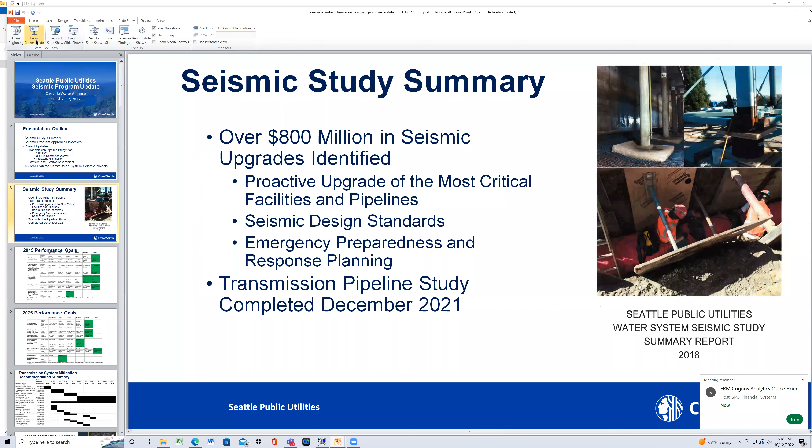Again, it's a long-term plan, a long-term program. We're not going to be able to fix everything tomorrow or upgrade everything tomorrow. The purpose of these next two charts is basically not so much to argue whether it should be 2 months or 6 weeks for 2045, but to show that things are generally going to get better, but that's going to take some time.

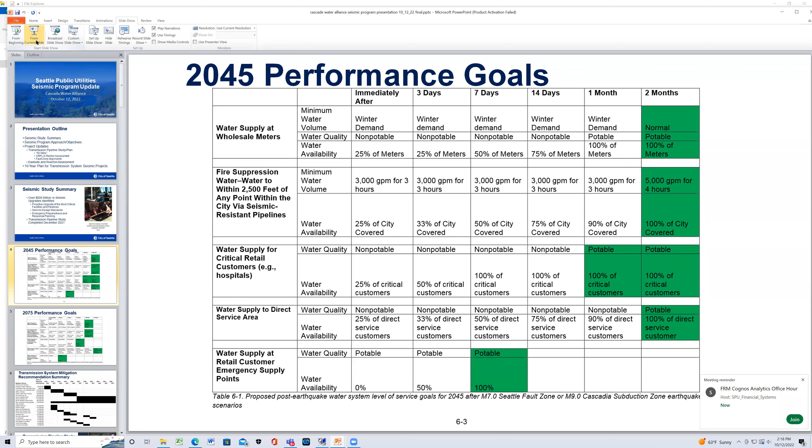So these are the 2045 performance goals, out almost 25 years. As you can see, there's still going to be, if there is a major earthquake, some significant damage and some significant recovery involved. Going out to 2075, more than 50 years from now, things get a little better.

If you're looking out maybe 100 years, my vision for 100 years would be if we had a major earthquake such as a magnitude 7 or magnitude 9 earthquake on the Cascadia subduction zone, it would look somewhat like it looked after the Nisqually earthquake. That is, it's still going to be a big deal, but it's not going to be a disaster where you have people without water for a month or two.

To try to meet these goals, we came up with a long-term plan, out of the seismic study. So far, well, it's only 4 years, so of course we're mostly on track. Where we're falling behind a little bit are on some of the projects that are more internal labor intensive. For example, the seismic isolation valve, we haven't really gotten very far in that.

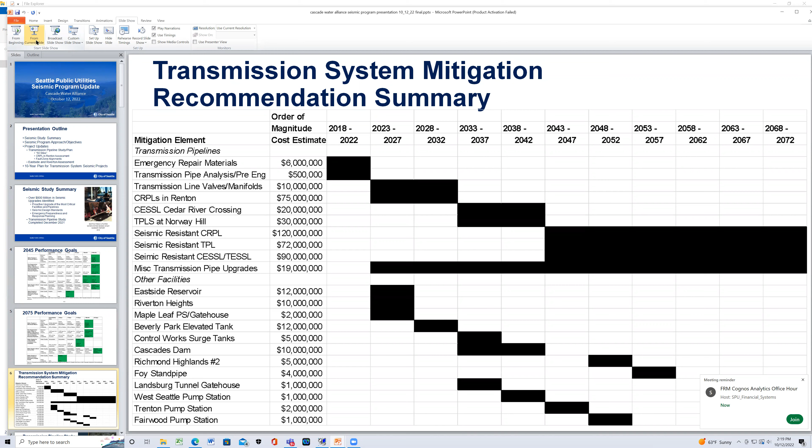We've been running into manpower issues as far as getting emergency repair materials so that we'd have those in stock if there was a major earthquake before we could upgrade things and had to make emergency repairs. So those are proceeding, just a little bit behind schedule due to staffing issues. As far as some of the CIP projects where we're hiring consultants, those are pretty much on track.

Shifting into some of the projects that have recently been completed, late last year we got the final report for the transmission pipeline study. There are actually 3 studies within a study.

The first was what we call the 50 site study, looking at approximately 50 sites we didn't have the resources to get to during the original seismic study. We hired Infraterra as a consultant, and they went out to all these sites - actually 53 or 54 - and looked at available soil borings and made assessments as to the vulnerability of these different transmission pipeline sites.

We also did preliminary engineering for the Cedar River pipeline and Renton site. Cedar River pipelines 1, 2, and 3 go through a liquefiable area - it's a low area - and we identified this in the original seismic study as being vulnerable. So Infraterra did some preliminary engineering and came up with some recommendations.

And then finally, the third study within the study was looking at what would happen to transmission pipelines if there was fault rupture, and making some estimates - what type of pipe would be needed if we wanted to resist potential fault rupture.

Shifting back to the 50 site study, this is an example site form done for over 50 sites. It basically describes a pipeline. If you look down here, it shows potential settlements and lateral spreading for 4 different scenarios. This happens to be the Eastside supply line, Coal Creek crossing. What's driving it here is the Seattle fault and the 2475 ground motions.

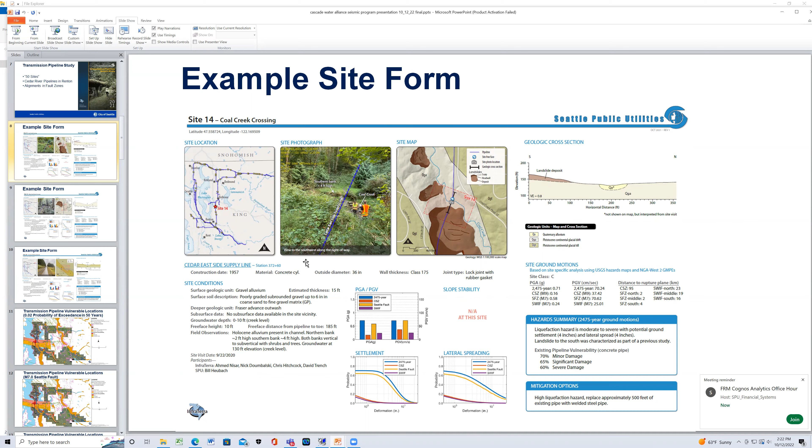Another example, a little bit further south on the Eastside supply line - this is the May Creek ravine crossing. With May Creek, it's not lateral spreading or settlement, it's more slope stability, but again there's some potential vulnerability in there.

Using a third site example, this is out on Tolt 1, also a concrete cylinder pipe. What's a little different from the Eastside supply line sites is what's driving this site is the South Whidbey Island fault, this purple line - it's not the Seattle fault. So the same event that causes problems on the Eastside supply line will not cause problems on the Tolt 1 pipeline, at least out here near the treatment plant, or somewhat close to it. That's important to note.

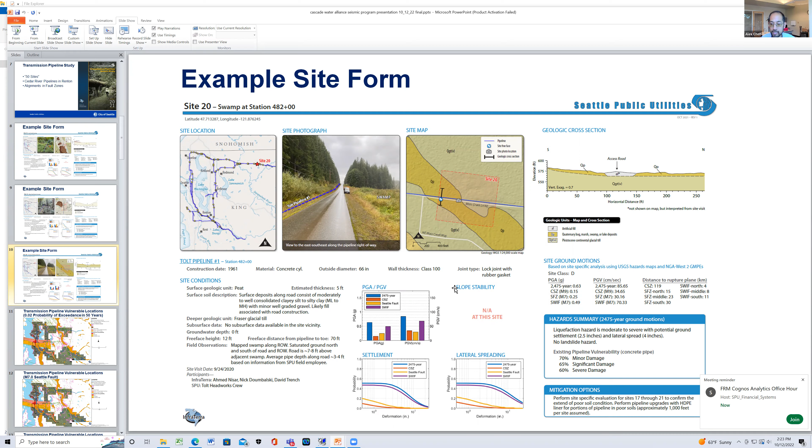Hey Bill, there's a question in the chat here. Josh from Kirkland was asking about the previous slide with the percent of meters on service level recovery - is that referencing the number of wholesale meters we aspire to have active?

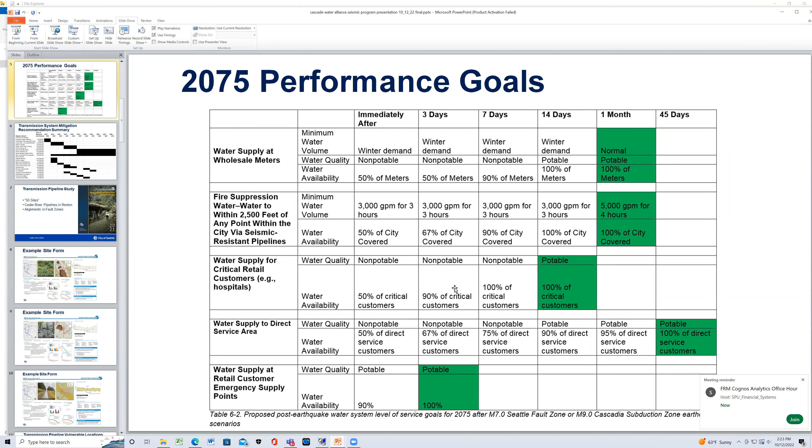Oh, we're going up here. This slide, I think, is what he's talking about - performance goals, water supply performance at wholesale meters. Yes, that's a percent of wholesale meters. Okay, thanks, thank you.

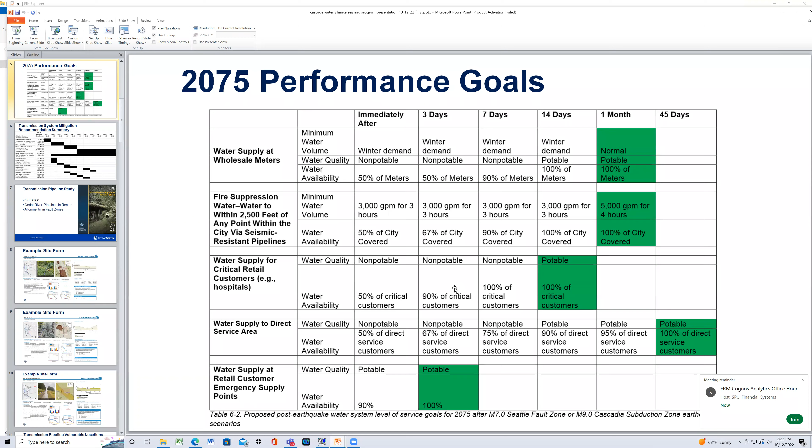Carry on, okay, I'll monitor the chat. Yeah, I can't see the chat since I'm doing it in this mode. If you want to wait 15 minutes, I could try to troubleshoot it, but we'll move on.

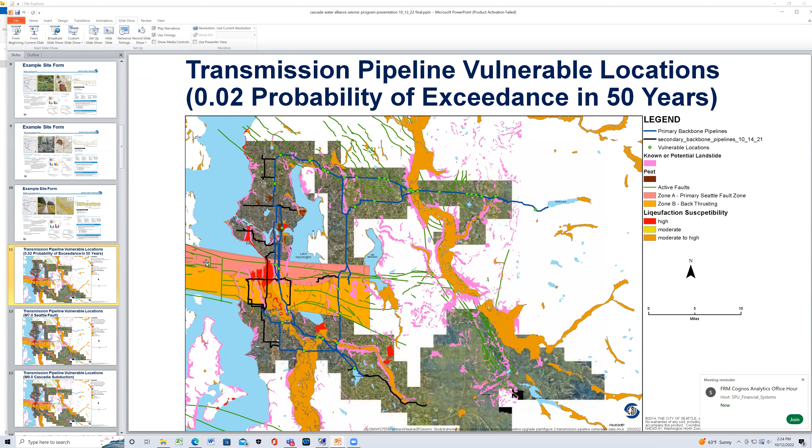What's important to note is that those probabilistic ground motions are not going to occur at all sites simultaneously. So this looks bad, but it would not be this bad for a single event.

As an example, moving down, this shows for the magnitude 7 Seattle fault event we looked at. You can see there's still a significant number of breaks affecting just about all the transmission pipelines, but it's not quite as bad as if the 2475 motions were to occur simultaneously.

What's interesting, and why I used the May Creek and Coal Creek slides, is if you look here, Coal Creek is still shown as vulnerable during the Seattle fault event, but May Creek is not. So that's saying that for May Creek to have problems, the event would have to occur closer to May Creek than the event we assumed during our analysis.

That's important to point out - there are a multitude of different scenarios here. We looked at 3 or 4 discrete scenarios, but there are many more, so there is some uncertainty in all this.

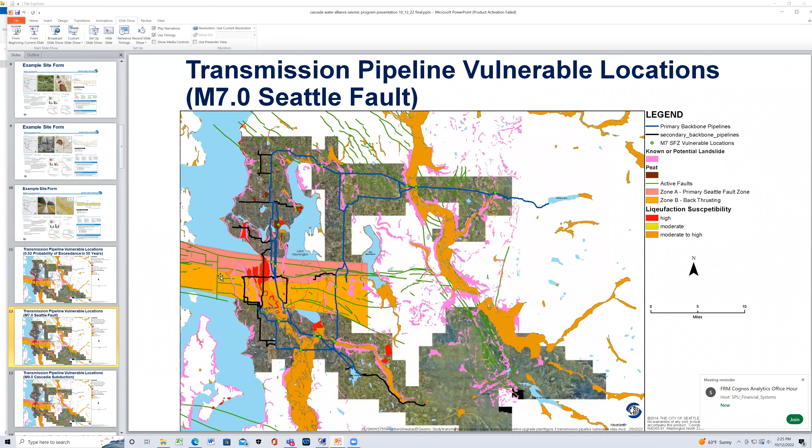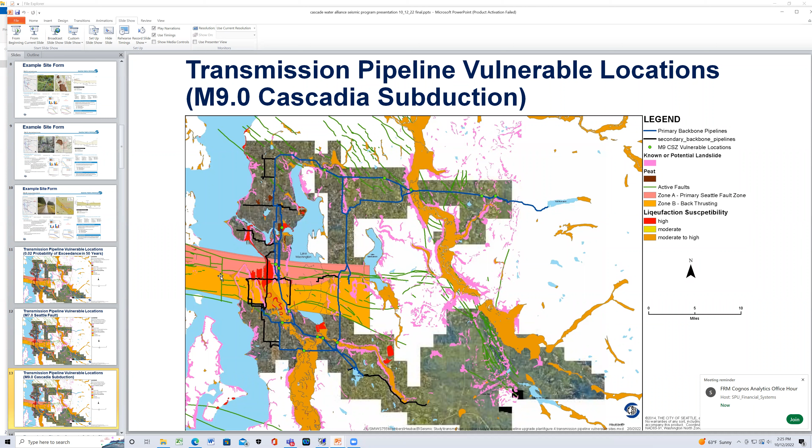Going down, this shows the vulnerabilities for a magnitude 9 Cascadia subduction event. As you switch back and forth between the slides, you can see there are some commonalities, but some that are not common, as I just pointed out.

What I'm trying to point out is that concrete cylinder pipe typically lasts 60 to 125 years. Most of our concrete cylinder pipe was installed around 1960, so over the next 50 to 60 years, most likely we'll have to replace or rehabilitate this pipe anyway. As we put together a plan for upgrading transmission pipelines, it doesn't make sense to proactively upgrade it just for what could be 20 to 30 years before we replace it anyway. So instead of proactively upgrading these concrete cylinder pipelines, we'll wait till they need to be replaced, and when they do get replaced, make sure they're seismic resistant.

That feeds into the next slide, which is our philosophy. We're only looking at vulnerabilities to liquefaction, landslide, or ground shaking. We're not looking at upgrading lines just because there's fault rupture. I'll talk a little more about that in a second.

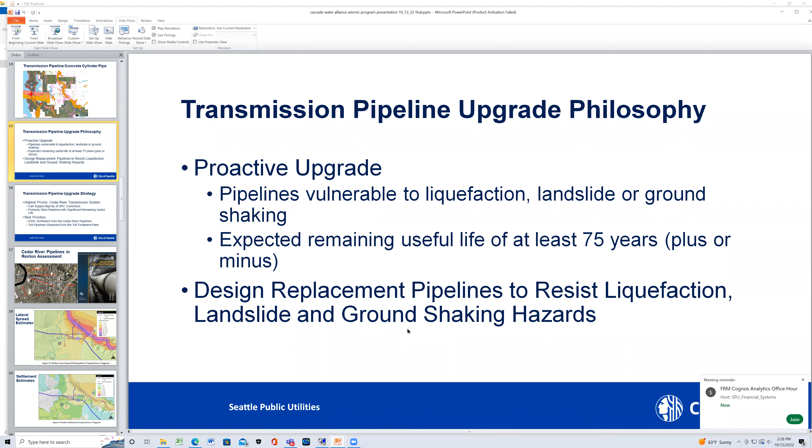As far as geographically where we're going first, we're going to prioritize the Cedar River transmission system. The reasons are: first, you can supply the most customers out of that system; second, it's primarily steel pipe with significant remaining useful life. So we'll be looking at going basically up from Lake Youngs through Seattle and up to Lake Forest Park. Our next priority will be going northward on the east side supply line, again from the Cedar River crossing up to the Tolt junction. The last priority would be going westward from the Tolt treatment plant, the Tolt pipelines. Again, a lot of these pipelines are concrete cylinder pipe, which will be replaced in the not too distant future, relatively speaking.

I'll stop here before going into the Cedar River assessment, in case anybody has any questions or comments. Feel free to unmute and ask questions or post to the chat, either way.

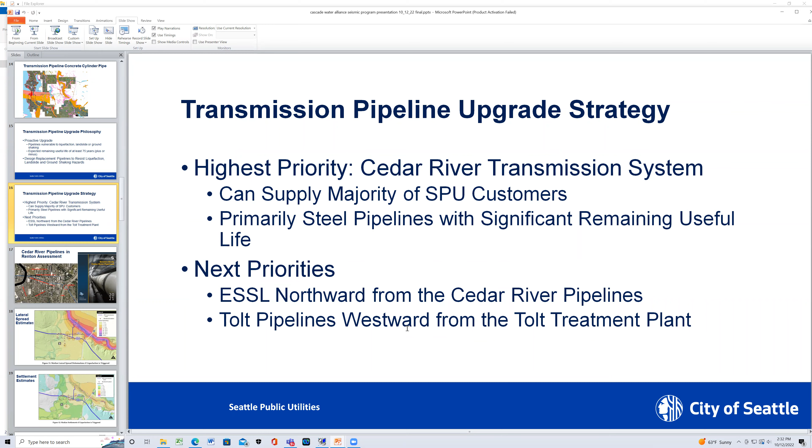One thing about concrete cylinder pipe is it's fairly brittle. Although we identified some point locations where we know we had unstable ground, it's really anywhere along those alignments you could have issues if there's any sort of ground movement. For the ESSL, we identified May Creek and Coal Creek, but anywhere along here with unanticipated ground movement, just because the pipe is so brittle, there could be issues. So for me, to feel entirely confident about the ESSL, you'd have to have steel pipe through all of here.

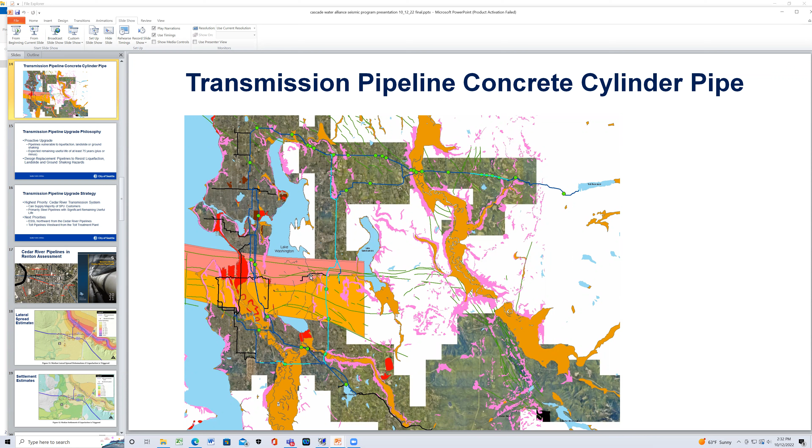Okay, I will move on to the Cedar River and Renton alignment. This was an area identified during the 2018 study. As part of the transmission pipeline study, we began preliminary engineering on this site. Most people are familiar that the Cedar River pipelines drop down through utilidors under I-405 and traverse through Renton, crossing the old Black River trench channel before heading back up the hill into Seattle.

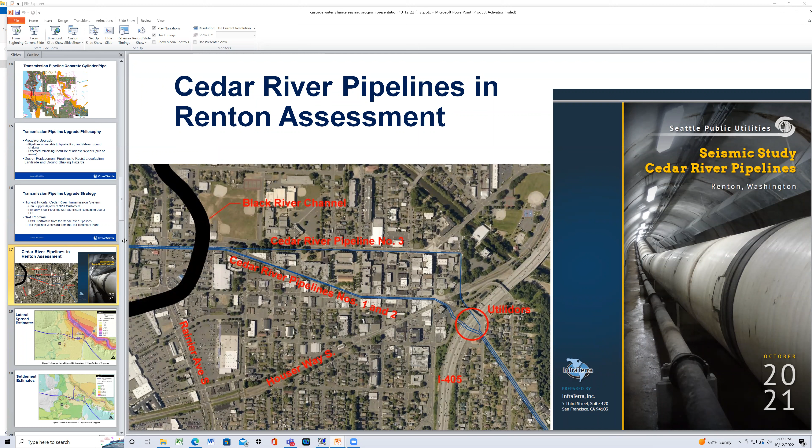The news was kind of good for this part of the study. When we did the high-level study, we were looking at settlements and displacements greater than a foot or so. When we started looking at some of the borings - these dots here are actual soil borings available during the study - we had a couple places where displacements are on the order of 5 to 10 inches, but certainly not on the order of a foot or so that we suspected during the original seismic study.

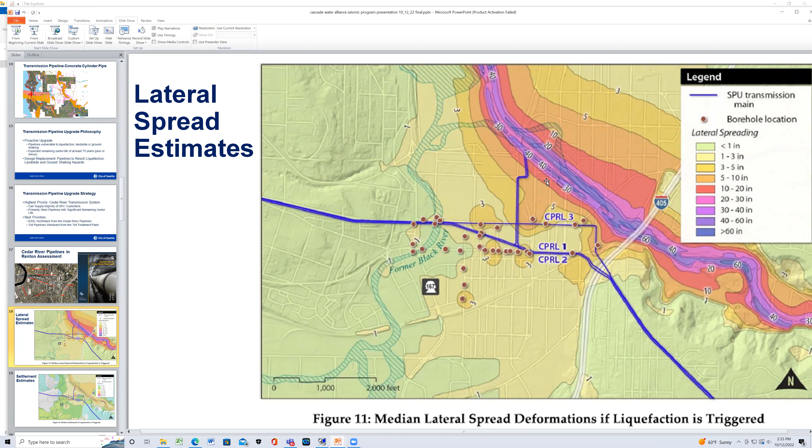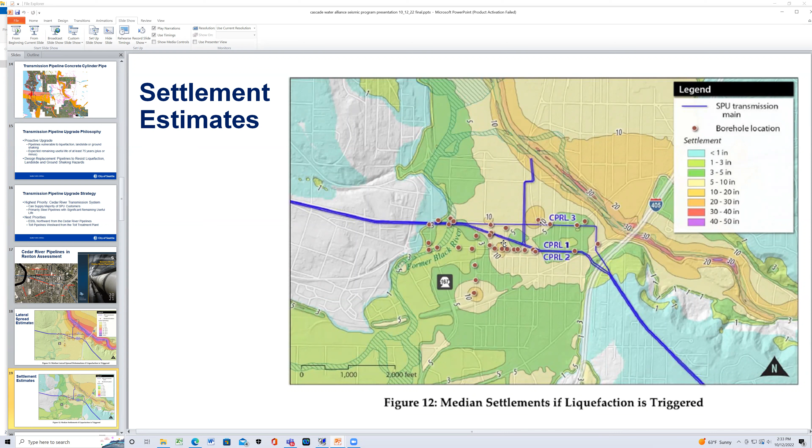This is showing the lateral spread - the soil liquefies and would move laterally, most likely towards the Cedar River right here. Going to the next slide, where you have the settlement estimate - this is just pure settlement. Again, you have some areas through here that are 5 to 10 inches, but certainly not the 12 to 18, 24 inches we thought we might have during the original seismic study. So that was kind of good news.

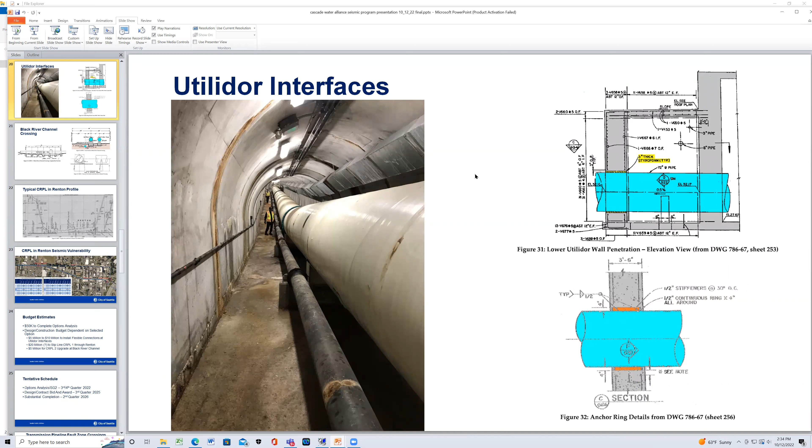Where we did find some problems were at the utilidor interfaces. What happens is the pipelines come down through these utilidors under I-405. They're kind of free to travel through this external wall, but this first internal wall is fixed, and right here there's a flexible coupling. The concern is that the soil liquefies here, the pipe wants to move longitudinally, it can move longitudinally, and when it hits this flexible coupling, the coupling would simply pull off and break the pipe. So that was the first area of concern we identified during the Cedar in Renton study.

The next area is the Black River Channel. Cedar River pipelines 1 and 3 are supported on these pillars here, and the pillars actually stand below the liquefiable soils in the good soil. Pipeline 2 is direct buried, and in the Black River Channel itself it's direct buried in good soil. However, it comes down the slope of the old channel in poor soils, so there's concern about potential differential displacement with Cedar River Pipeline number 2.

And this is just showing some diagrams of the saddles that support 1 and 3, and then obviously an elevation view crossing.

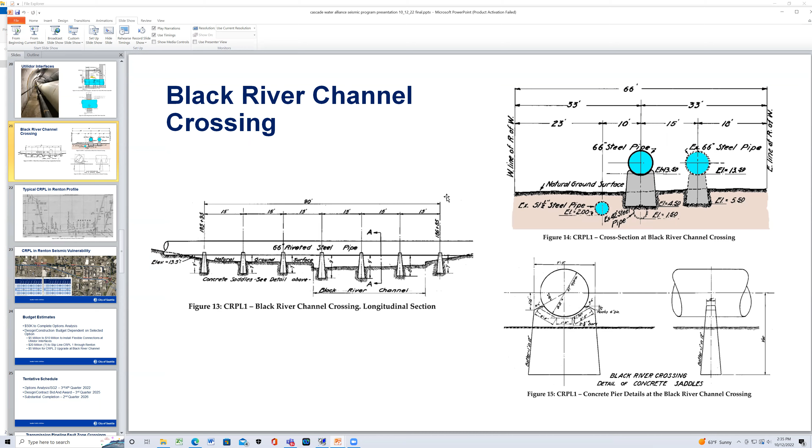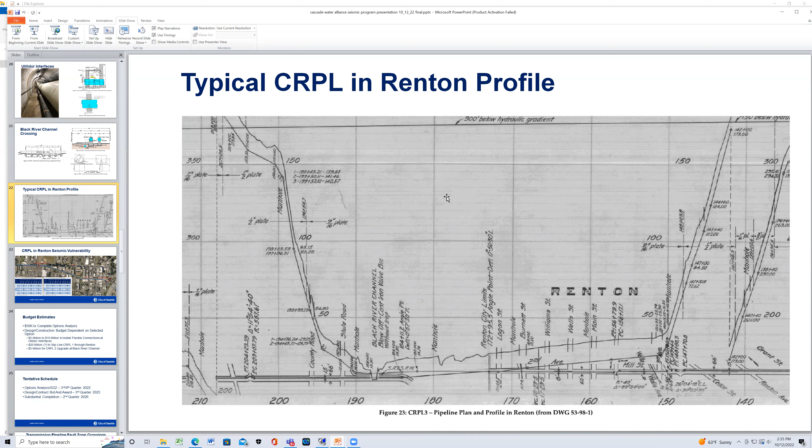The purpose of this slide is just to show that Renton is a low spot, which I'm sure everybody here is aware of. What it means as far as pipeline assessment or vulnerability and consequences is, first of all, the pressure is 200, 205 PSI static. So there's a lot of pressure down there. The second thing is it is a low spot, so if the pipe breaks, there's a significant area that's going to be flooded.

In the original seismic study, we thought we were going to have to reline at least one of these pipelines with something more flexible. Based on the more detailed results, we're now thinking that we really don't have to do that. It's okay not to reline any of the pipelines, because even in an extremely low probability event, the best estimate is these pipelines are going to be okay. If there is something wrong, maybe it's most likely going to be a leak.

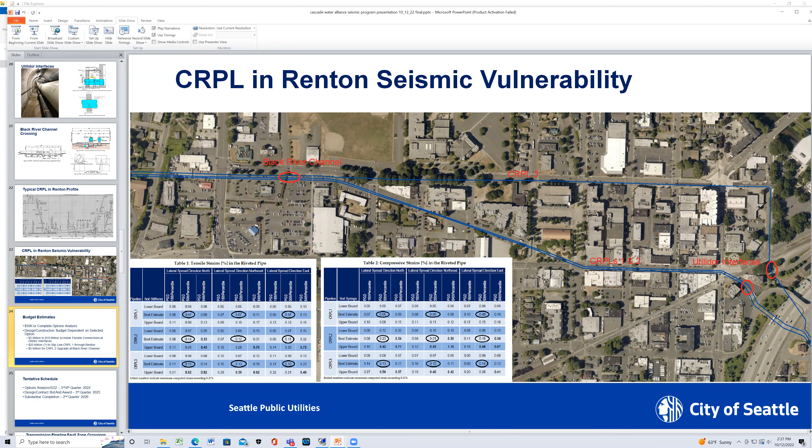So we backed off our original $75 million estimate for upgrading the Cedar River pipelines in Renton. We've come down to maybe on the order of 5 to 10 million if we just do the flexible couplings at the interfaces, which I think are definitely needed, and maybe an additional 5 million if we decide to do something with CRPL 2 at the Black River Channel crossing.

Right now we're just completing the options analysis. It was supposed to be done third quarter. We had some bureaucracy get in the way, but it looks like we're on track to have that done by the end of the year.

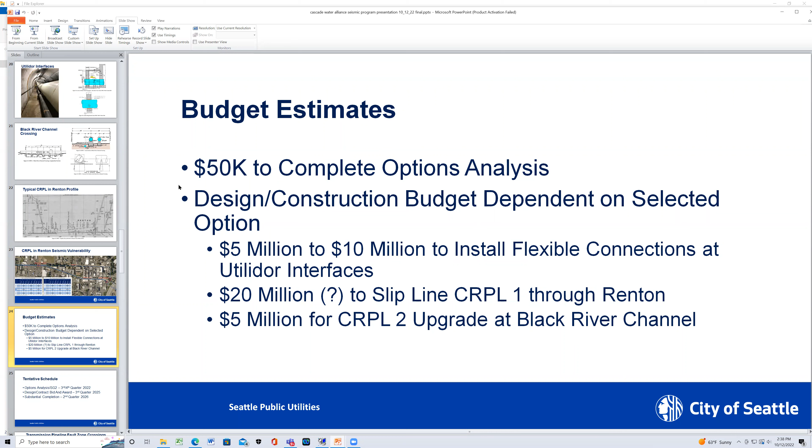So tentative schedule, as I mentioned, the options analysis is supposed to be done, but we're a month or 2 behind. We would bid the contract 2025 third quarter with completion in 2026.

There really needs to be an asterisk with those dates, because in our discussions with Renton, there's a potential WashDOT project where the utilidors come out from underneath the freeway, and they're talking about building a skyway or something like that. So that's something we're going to have to coordinate with. My understanding is a couple of those office buildings are going to be demolished. So I have to put an asterisk on those dates, because we are going to have to coordinate this with Renton and WashDOT depending on their project schedule.

So any questions on the Renton project before I move on to the next?

Going once, going twice, okay.

And then finally, we took a look at what it would take to put in a seismic resistant pipeline that could withstand fault ruptures along or through either the Seattle fault zone or the South Whidbey Island fault zone. This picture on the right is from the 1999 Chichi earthquake in Taiwan. This is an 80-inch diameter, over 1 inch thick, welded steel pipeline, and you can see it was no match for the 2 or 3 meters of fault rupture they had.

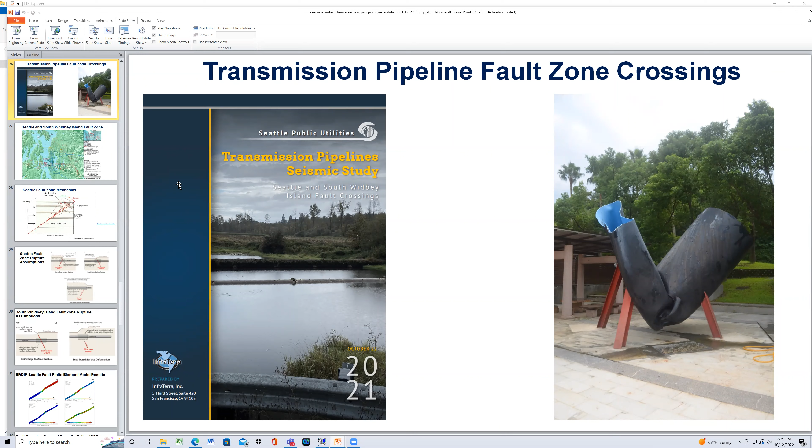Both zones are 4 or 5 miles wide, which creates some challenges because you don't have to design for just 200 feet. You got 4 or 5 miles where the potential rupture could occur. So that creates some challenges as far as budgeting and whether it's worthwhile or not.

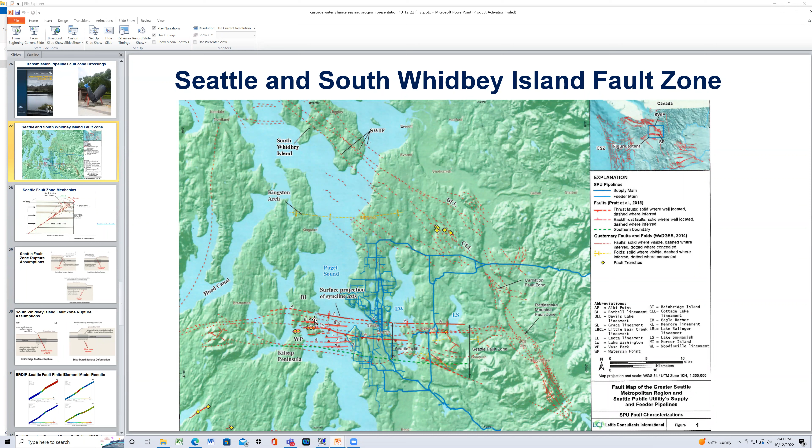So there's a lot of uncertainty, and it's low probability, and so that's kind of like why we're thinking that, well, maybe we don't have to upgrade for fault rupture, or at least design in the future for fault rupture.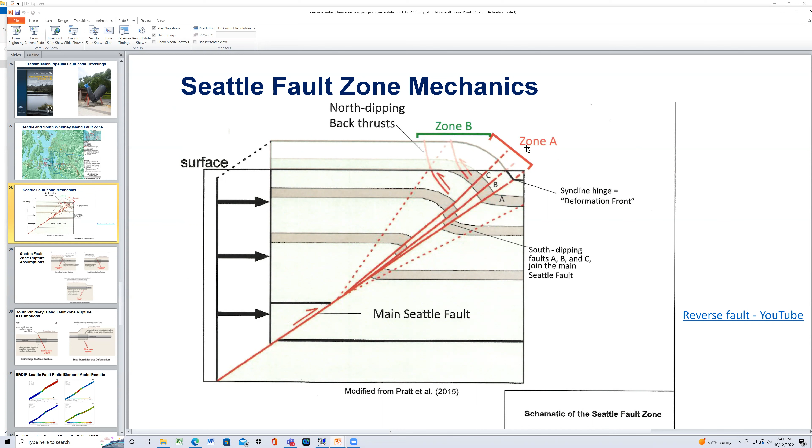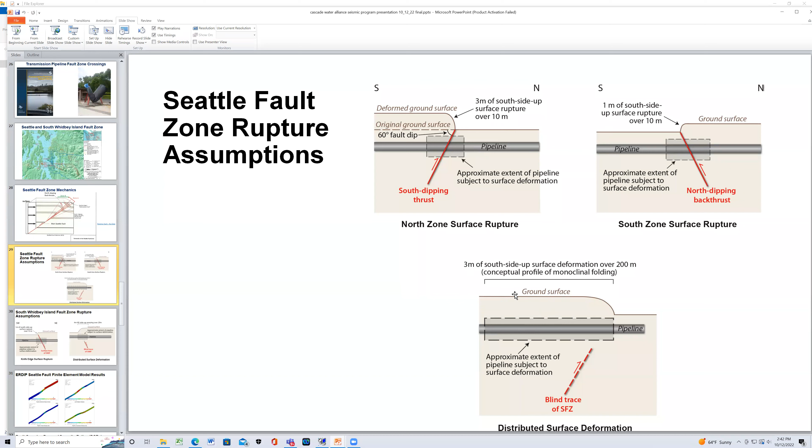These are the different models or assumptions they made to model fault rupture. They looked at a couple of different angles, displacements, the amount of displacement, or the width of displacement. Here you have 1 meter over 1 meter over 10 meters, 3 meters over 10 meters. Here you have a longer displacement and more gradual thrust. These were the Seattle fault zone assumptions.

Going down to the next slide is the South Whidbey Island fault zone rupture assumptions. In general, the displacements on the South Whidbey Island fault are not expected to be quite as large as the Seattle fault, but there's still a lot of uncertainty. And even if it's only a meter, if you have a concrete cylinder pipe, that concrete cylinder pipe's not going to do very good. In fact, even a welded steel pipeline might not do very good.

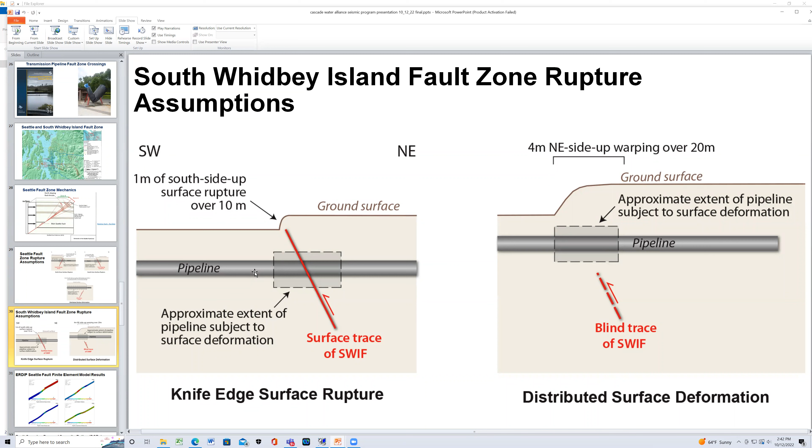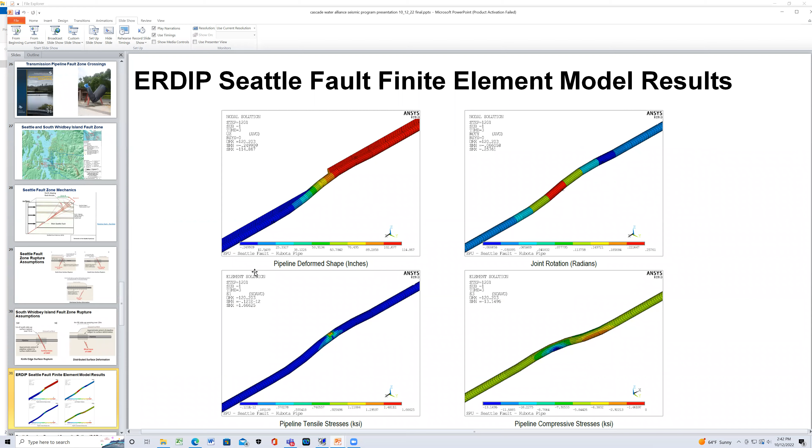The issue with not going ahead with using ERDIP everywhere is, number 1, the expense, and how much of an additional expense is somewhat debatable or even somewhat unknown right now.

There was a recent project, Metropolitan Water District, MWD. They were putting in 2 miles of earthquake resistant ductile iron pipe, 104 inch. Very large pipeline, ductile iron pipe through a 2-mile fault zone. And their bid prices on the material, they have parallel lines. They have an ERDIP line in the same size, 104 inch welded steel line.

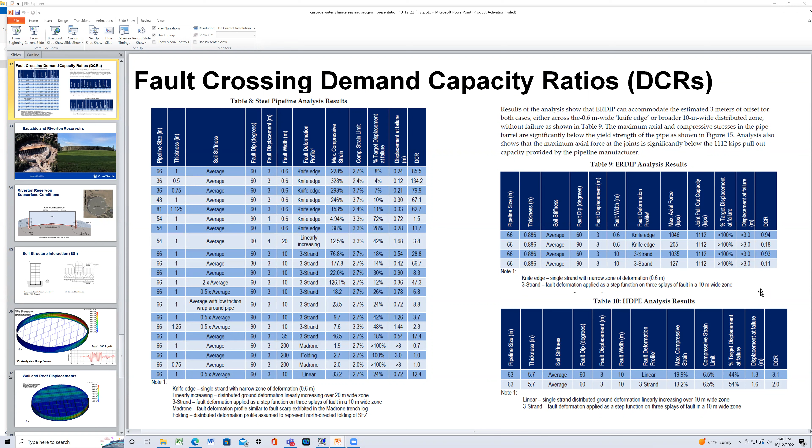Okay, I will move on to Eastside and Riverton. Eastside Reservoir, 30 million gallon DYK tank, the largest tank of its kind when it was built.

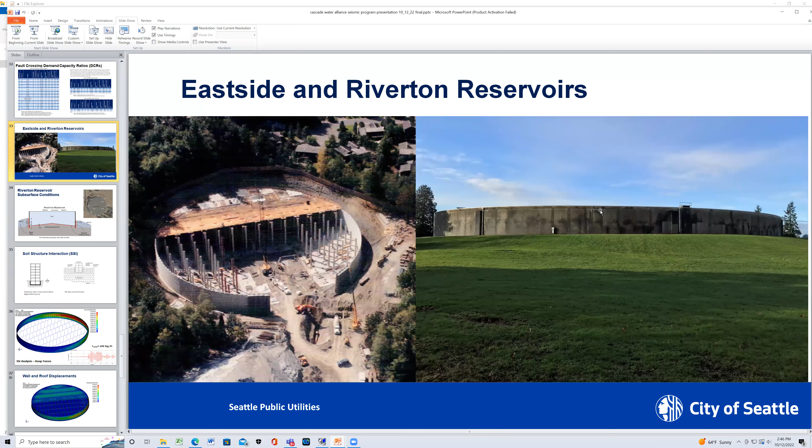So we've started taking a closer look at both of these reservoirs. Switching to Riverton first. It's over by the airport.

If you're not familiar, you can see it if you take off to the north and look to the east down on the ground. It's sitting on undisturbed glacial till.

Our initial findings from the seismic study were that this reservoir was going to be very vulnerable, and that's kind of what we've been able to back up during this follow-on study, even though not vulnerable in kind of the spots we expected it to be vulnerable.

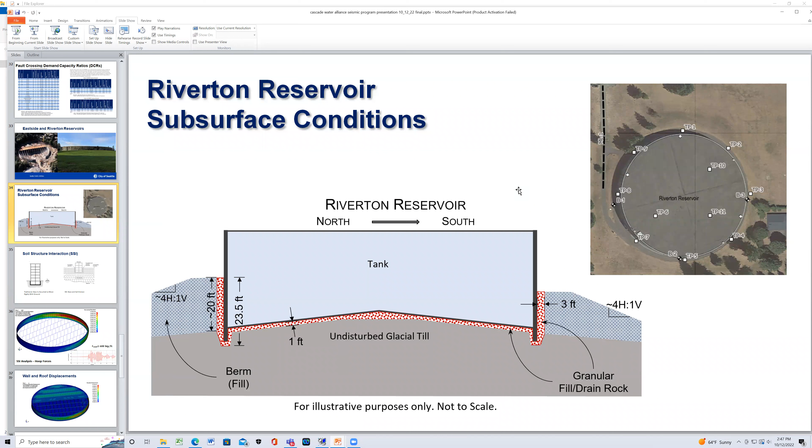For both reservoirs, and this is a slide that's not in the original presentation, but Kathy will get you this final presentation after today, we're using soil structure interaction. The advantage of soil structure interaction is that it more accurately models what happens during the earthquake.

Traditionally, when you have a structure, the foundation is assumed to essentially move rigidly with the ground when the ground moves. What happens in real life is the ground pushes on the structure. As the structure vibrates back and forth, it pushes back on the ground, which pushes back on the structure, et cetera. And so you get a lot more damped performance, or response, of the structure. This usually leads to lower structure forces, which can save you money in design.

So we are using SSI for both the Eastside and Riverton reservoirs. We're doing a check, because even though the code says you can use SSI, and it's becoming a lot more popular to use, the current building code says if you do use SSI, there are limits to how much you can reduce the force over a traditional analysis. So you want to do a traditional analysis anyway, to make sure your SSI modeling seems reasonable, but you're also forced to use it anyway, just so you can make sure you're still in compliance with the code.

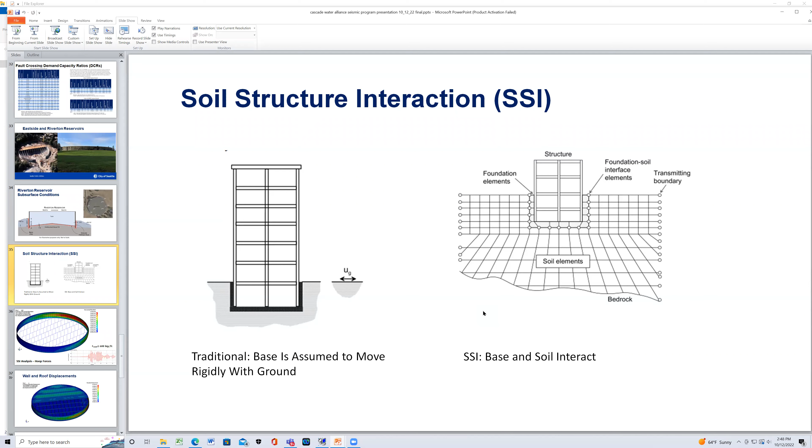This is the roof and wall displacements, and hopefully, okay, it's playing full speed. That's good.

There are two natural periods for a reservoir. One is the sloshing period, and the other is the impulsive period. That is the rigid structure, where the water kind of moves a little bit independently of the structure.

For both Riverton and Eastside, the sloshing periods are on the order of 18 seconds. So as you see this move back and forth, this is a 15-second loop with some of the strongest ground motions. You really don't see any effects of the sloshing, but what you do see is the impulsive, more rigid motion, and the natural period of the impulsive motion is around 0.3 seconds. So it's quite a bit of difference, 0.3 versus 18.

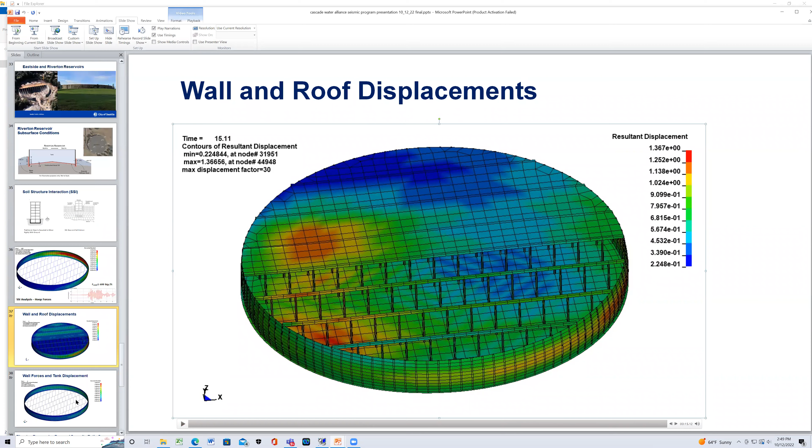Going down to the next slide here, this just shows the displacements, the wall forces and tank displacements. You can see the tank and the columns move around inside a little bit with this video right here.

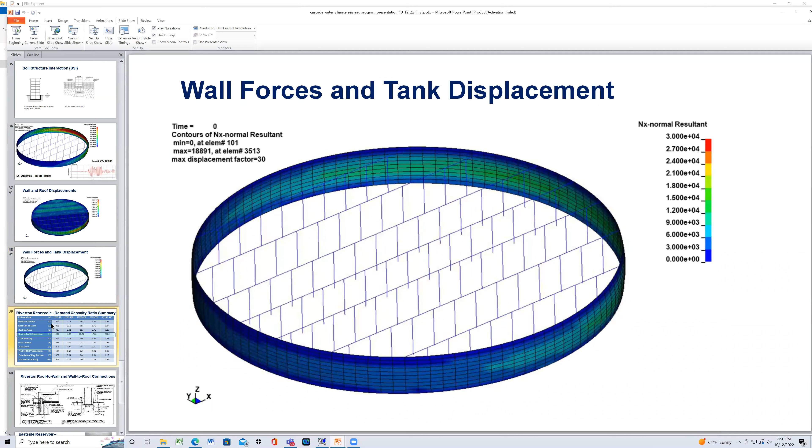This table sums up the demand capacity ratio, DCR, for different assumptions. The UHS 72 would be a 72-year event, 50% probability of exceedance. The UHS 475 would be a 10% probability of exceedance in 50 years. The 975 is 5%, and the 2475 is 2%.

This shows the different demand capacity ratios for different failure modes. Obviously, what jumps out is the roof to wall connection. This is high enough that we probably experienced some damage in the Nisqually earthquake, and I'll show you why we didn't see it.

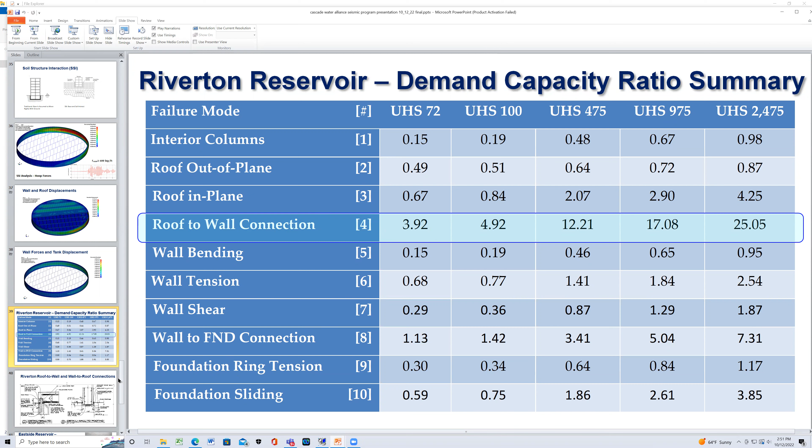Going to the next slide, zeroing in on the roof to wall connection, it's all kind of hidden and buried. There's probably some bending and distress around the steel pipe in the Nisqually earthquake, but we didn't see it because it's all covered up with concrete. You can see there's not much of a connection at the wall to footing connection, so you can see why there would be some problems down here.

These roof to wall connections are puzzling to me because there's damage, but is it something you really need to spend a lot of money to upgrade? If you have damage there, you may have some water quality issues, which you're going to have anyway after a major earthquake, but it doesn't affect the overall functionality of the reservoir. That'll also come up when I talk about the Eastside Reservoir. When you talk about separation of the wall from the foundation, or any cracking on the floor or in the wall, that's where you lose containment, and that's something that definitely needs to be dealt with.

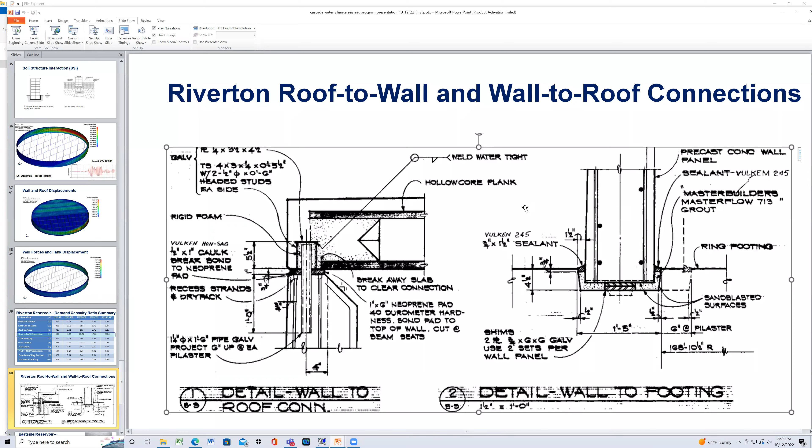This is a new slide. I think in the original deck it just said TBD. Well, this is the TBD. These are the preliminary Eastside Reservoir results.

Again, looking at the demand capacity ratios, you have a couple of different areas with DCRs over 1. Not surprising that the roof to wall connection is greatly over 1, and we saw that in the Nisqually earthquake. Even that small earthquake caused issues right here, where basically you have a sawtooth roof that separated from this side and compressed against this side, just like the Riverton Reservoir roof to wall connection. It's not going to work, it's going to fail.

This reservoir is buried, so there will obviously be some water quality issues, but we're probably going to have a boil water order anyway. So it's something you really need to address only if it's going to affect reservoir functionality.

What's more concerning is down here, if you look at foundation sliding, this would be the foundation part that the wall sits on. If this starts to slide, it's going to crack with the rest of the foundation, and if you have cracks in the foundation of the tank, obviously the tank's going to drain out. This is definitely a functionality concern.

Again, with some of the DCRs over 1 on the wall, if you have cracks in the wall, water drains out, that's also a functionality concern. So those are two issues that we're going to be looking at addressing.

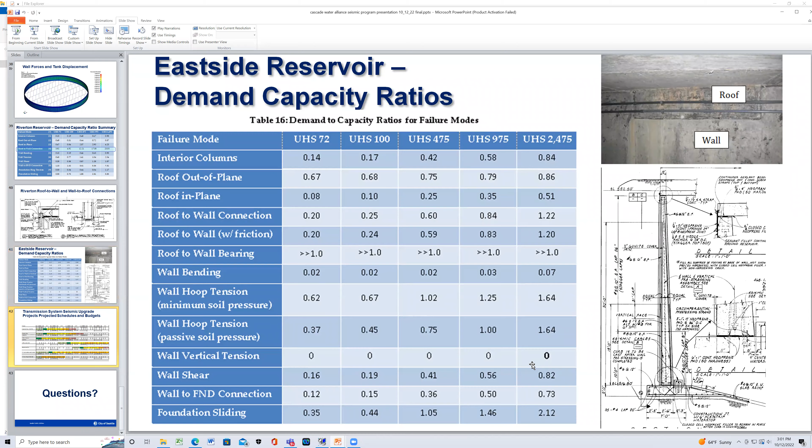Final slide, this is just from March of this year. These are the projections for over the next 10 years or so for our transmission pipeline projects. No real big change. If there is a change, it's here for the Eastside Reservoir, for the CRPLs in Renton, where we had the options analysis being done by third quarter - it's going to slip into fourth quarter this year. As I mentioned, the construction schedule here might be subject to change just because we're going to have to coordinate with WashDOT and Renton, but so far everything looks like it's on track as shown in the schedule.

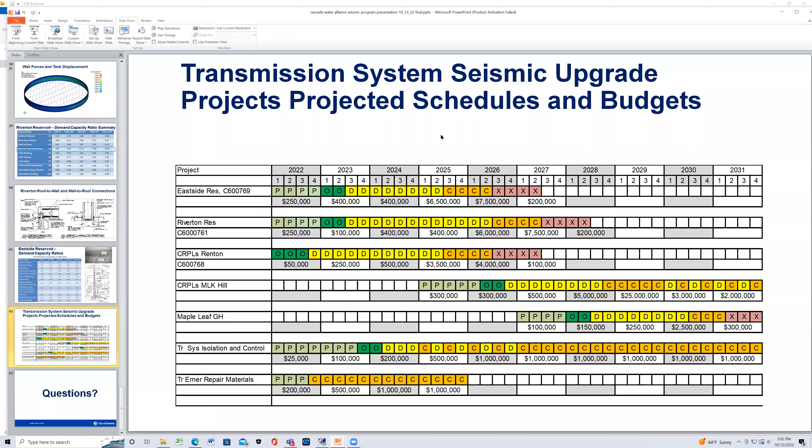So, with that, are there any general questions?

Nice compliment from Andy and Bill. Nice job presenting, that's in the chat. Andy just wants a free meal. You know guys, where...

We have a hand up, I see, from Jay. Yeah, thanks, awesome presentation, you've overwhelmed me. Obviously this would be something that the Cascade membership would love to have a copy of to digest and sort through. My question is going to be kind of simple though, or basic.

The membership relies heavily on what I believe is the Cedar Eastside supply line and the Tolt Eastside supply line. And I'm wondering what you guys are doing with logistics for materials, anything that would bring those lines back in service in the event of an event, and whether, particularly if one or both bridges go out, and if you've considered storing commodities on this side to have it closer to be brought into play.

Yeah, we have a project to purchase spare materials, and it's been stop and start. Right now we're kind of in a stop zone where we've gotten as far as we know what we need, and we've identified tentative sites for where those materials and other equipment should go. But that's as far as we've got. We have tentative sites, but we haven't finalized sites.